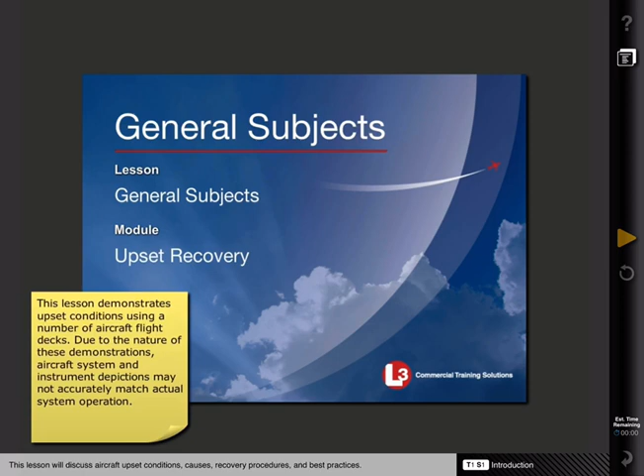Although loss of control in-flight accidents are relatively rare, they make up an average of 1/4 of all aircraft fatalities worldwide. An ICAO symposium tasked with addressing these incidents showed a lack of proper pilot training industry-wide for aircraft upset awareness and recovery techniques. The committee expressed support for a global and coordinated effort to address loss of control accidents.

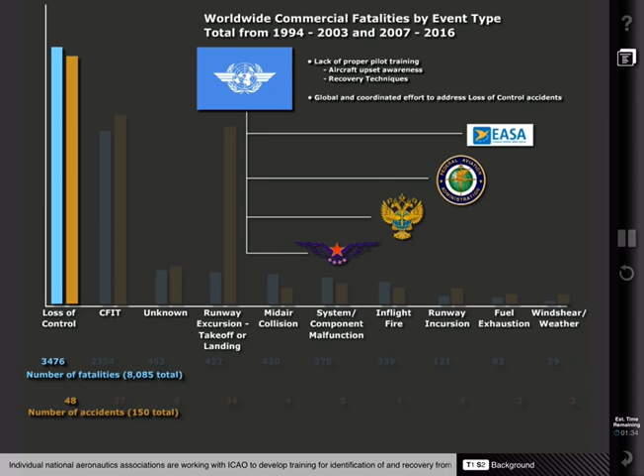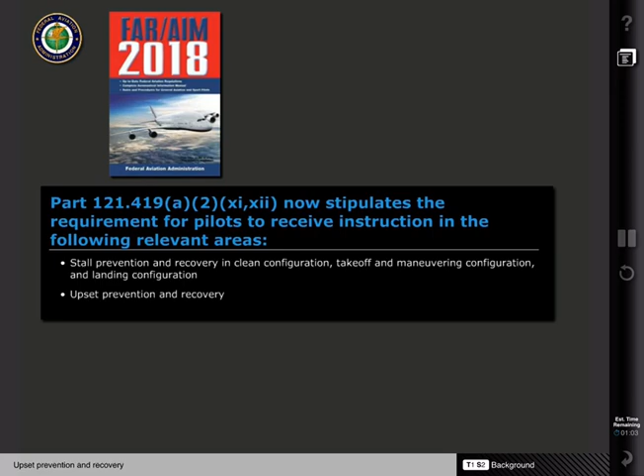Individual national aeronautics associations are working with ICAO to develop training for identification of and recovery from upset situations. In the U.S., this has led to a revision of the Code of Federal Regulations. Part 121-419A-2, Subparts 11 and 12, now stipulates the requirement for pilots to receive instruction in the following relevant areas: stall prevention and recovery in clean configuration, takeoff and maneuvering configuration, and landing configuration, and upset prevention and recovery.

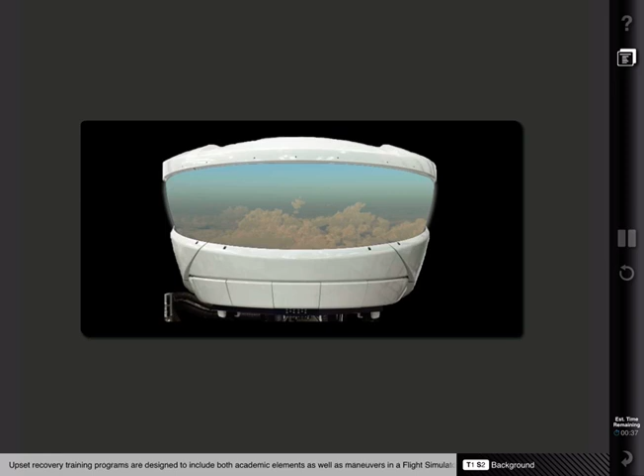Further along in Part 121-419, it is stated that the training will be required no later than March 12, 2019, and must include 2 hours of ground training. Upset recovery training programs are designed to include both academic elements as well as maneuvers in a flight simulator training device, or FSTD. This training is required for pilots undergoing initial, transition, and upgrade training.

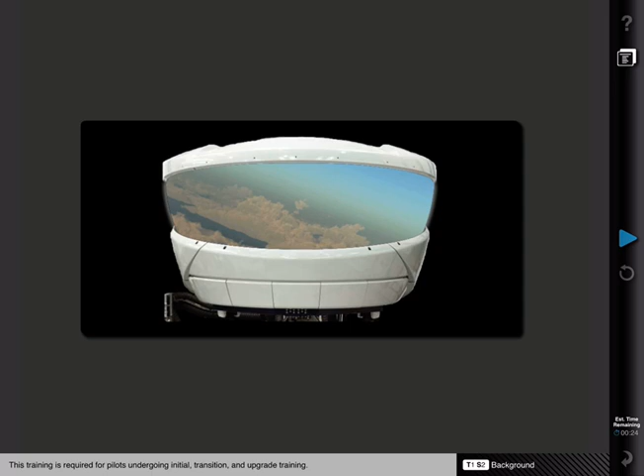In conjunction with the discovery of a pilot training deficit, it was found that most Level C and D training devices could not accurately replicate aircraft characteristics in upset envelopes. New requirements were put into place for simulator upgrades to include proper aerodynamic handling for these flight regimes.

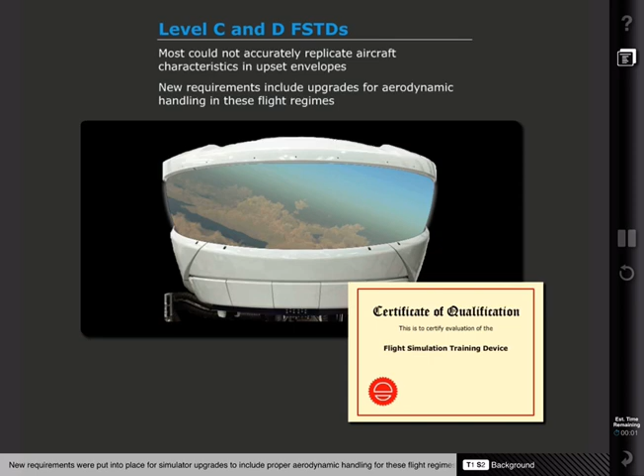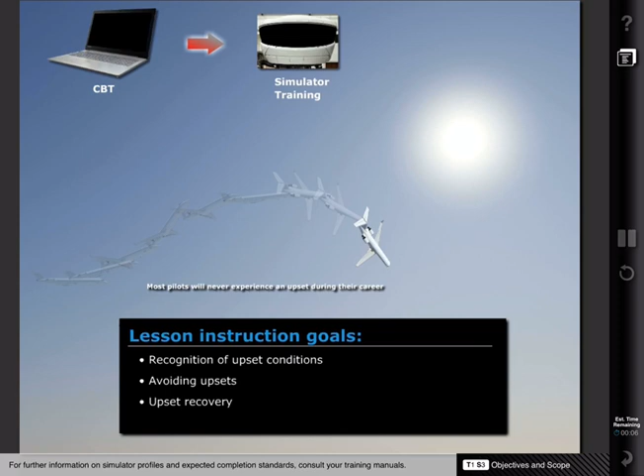Thanks to industry and manufacturer safety improvements over the past few decades, most pilots will never experience an aircraft upset during their career. Pilots must regularly train for and be vigilant in assessing upset conditions. The goal of this lesson is to instruct flight crews in the following areas: recognition of upset conditions, avoiding upsets, and upset recovery. This lesson is designed to preface and complement the required simulator training specific to upset recovery procedures. For further information on simulator profiles and expected completion standards, consult your training manuals.

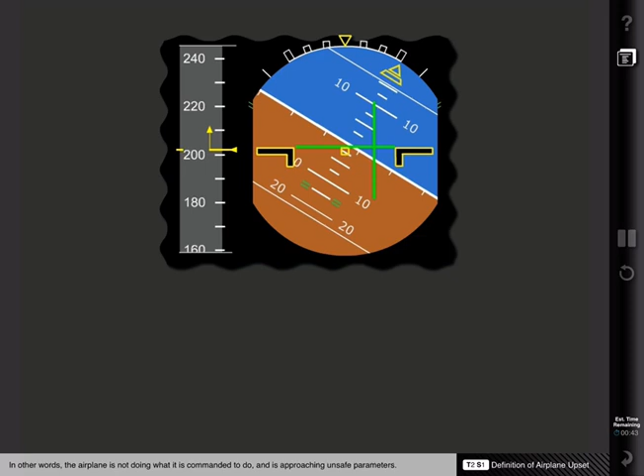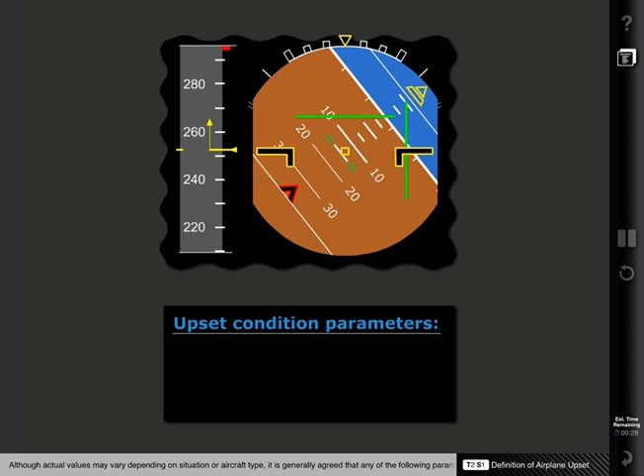An airplane upset is defined as an airplane in flight unintentionally exceeding the parameters normally experienced in line operations or training. In other words, the airplane is not doing what it is commanded to do and is approaching unsafe parameters. The key word in defining upsets is that it is unintentional. Although actual values may vary depending on situation or aircraft type, it is generally agreed that any of the following parameters, when achieved unintentionally, describe an upset condition: pitch greater than 25 degrees nose up, pitch greater than 10 degrees nose down, and/or bank angle greater than 45 degrees. An upset can also be defined when the aircraft is within the parameters above, but at airspeeds inappropriate for the conditions.

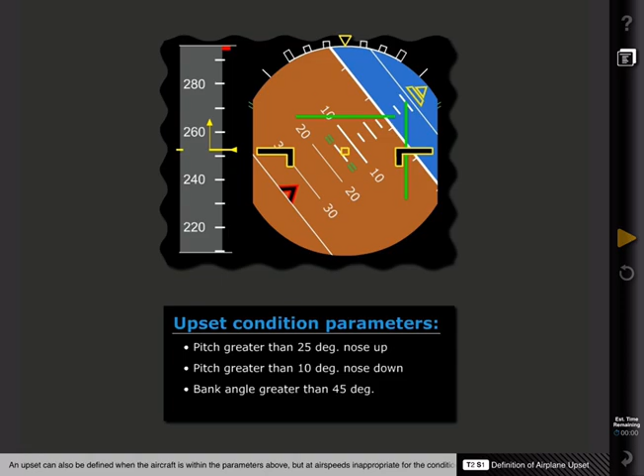In every possible scenario, avoiding an aircraft upset is far more desirable than having to recover from one. Prevention is key to upset condition training. Active monitoring of the aircraft and proper judgment is critical to avoiding an upset condition. Active monitoring can be defined as a proactive, knowledge-driven process of encountering and keeping track of how things are in relation to the perceiver and his expectations to enable the perceiver to take meaningful action. This means seeking relevant information, making important information available, filtering information that is meaningless, creating new information, and offloading cognitive processing onto the interface or adapting the interface to support monitoring.

Proper monitoring includes each pilot doing the following: know and understand the expected airplane state for the situation. Communicate expectations. Keep track of current airplane state. Detect and communicate deviations from expectations. Assess risk and decide on a response. Update and communicate understanding. And take timely corrective actions. These practices are the foundation for preventing and avoiding aircraft upsets through early intervention. Early interventions and correcting undesired flight path discrepancies will stop a divergence before it can evolve into an upset.

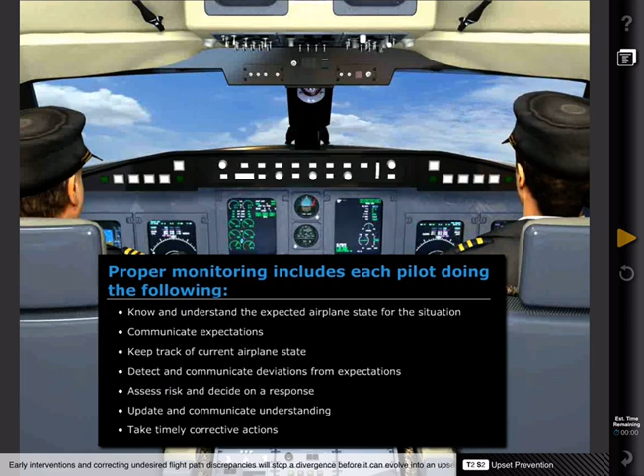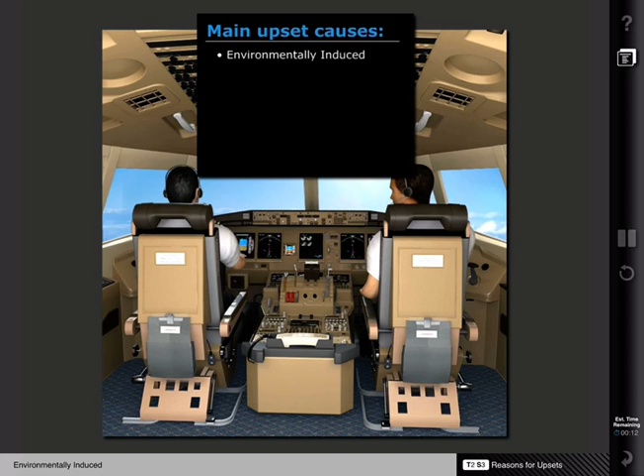Although the reasons for aircraft upsets may vary greatly, and in some incidents may be hard to ascertain, it is understood that the main categories of upset causes are: environmentally induced, system anomaly induced, pilot induced, or a combination of any of the above.

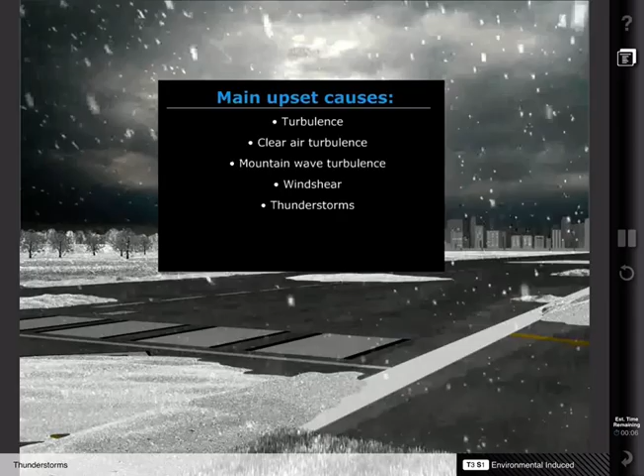Environmental factors are the largest factor in airplane upset incidents. With the exception of wake turbulence, environmental factors all derive from weather sources. Weather events that result in airplane upsets can include any of the following: turbulence, clear air turbulence, mountain wave turbulence, wind shear, thunderstorms, microbursts, or icing.

Non-clear air turbulence is that which is caused by convective or frontal air disturbances. This type of turbulence is typically associated with areas of measurable precipitation. Under most circumstances, these areas of weather-related turbulence are accurately forecast and can be detected real-time using onboard weather radar. For these reasons, this type of turbulence is the easiest to avoid.

Proper flight planning and situational awareness will reduce the number of situations where aircraft are flown into areas of known turbulence. If weather penetration does occur, severe or extreme turbulence can lead to an aircraft upset condition.

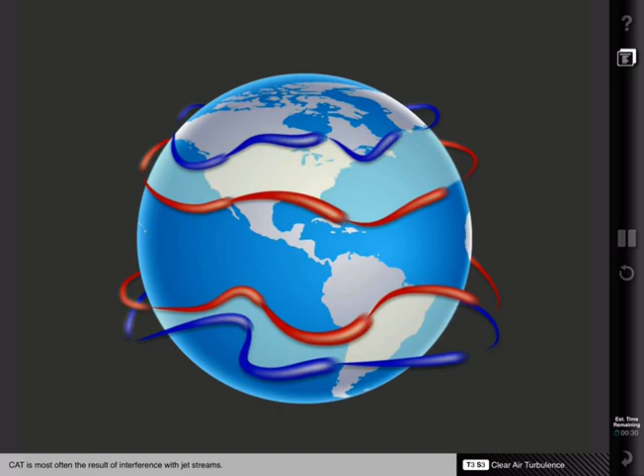Clear air turbulence is harder to forecast and therefore harder to avoid compared with convective weather turbulence. Clear air turbulence is most often the result of interference with jet streams. Atmospheric jet streams may exist in any number, at any time, and in any location. This, along with jet streams' characteristic of not having a consistent shape or size, means they are difficult to predict. Knowledge of high-altitude meteorology can aid in jet stream awareness, but the best predictor for clear air turbulence is pilot reports.

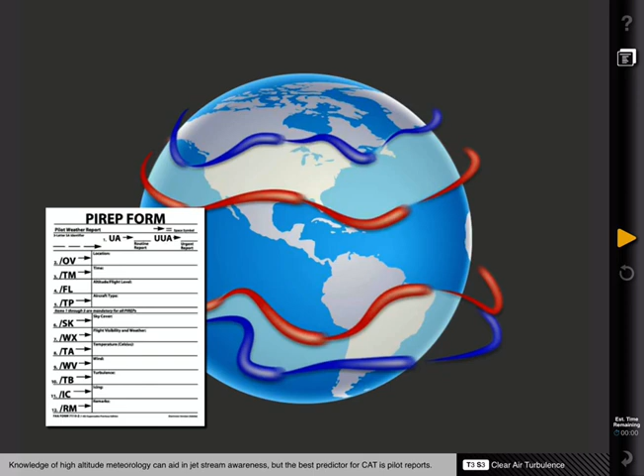Mountain wave or orographic turbulence is caused by disruption of wind flow by natural or man-made barriers such as a mountain range. Like clear air turbulence, this type can be formed in areas of no convective weather or precipitation. Because mountain wave turbulence is simply a factor of wind and geography, it can be easy to predict.

For example, when transiting the front range of the Rocky Mountains with a strong westerly wind, there will be a very high chance of mountain wave turbulence. While forecasting this kind of turbulence may be easier, avoiding it may not always be feasible if operating into or out of airports near these areas.

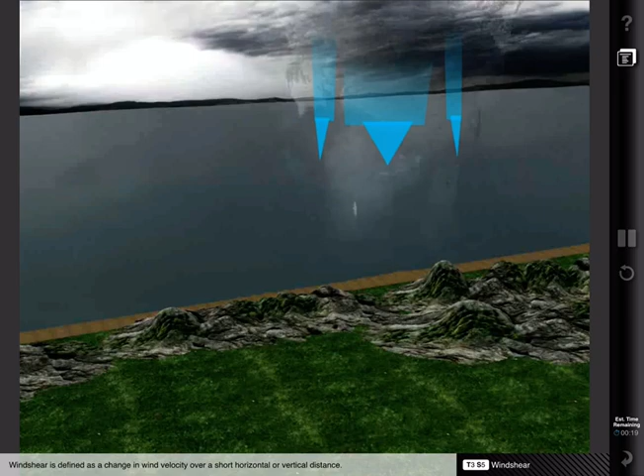Wind shear is defined as a change in wind velocity over a short horizontal or vertical distance. This can be caused by a number of different phenomena, some of them more avoidable than others. The best strategy for avoiding wind shear is to monitor pilot reports and be aware when operating in areas with known shear.

While there are different types of thunderstorms, all of them can be considered hazardous when it comes to turbulence and aircraft upsets. All thunderstorms are comprised of strong updrafts and downdrafts. Many storms also feature a gust front, an area of very strong winds and turbulence caused by the downdraft of rain-cooled air out of the storm.

Microbursts, a phenomenon associated with very powerful storms, are a rapid outflow of air from the base of convective weather. It is thought that about 5% of thunderstorms will produce a microburst. Intentional flight into a thunderstorm or microburst presents a substantial risk and can very easily lead to an aircraft upset.

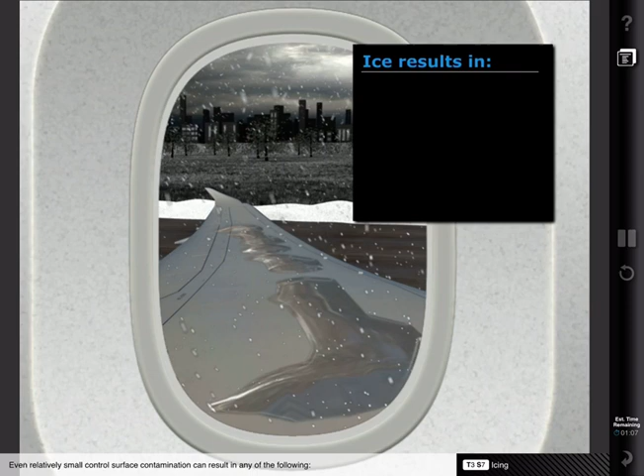Over the years, there has been a great deal of study to understand the formation of icing and mitigate its impact on safe flight. While the scope of this lesson is not to instruct in the best practices and techniques for operations in icing conditions, it should be stated that icing is a serious hazard that can and has led to aircraft upsets. Even relatively small control surface contamination can result in any of the following: unexpected airplane handling characteristics, degradation of lift capability, increased drag, or possible unanticipated changes in stability and control.

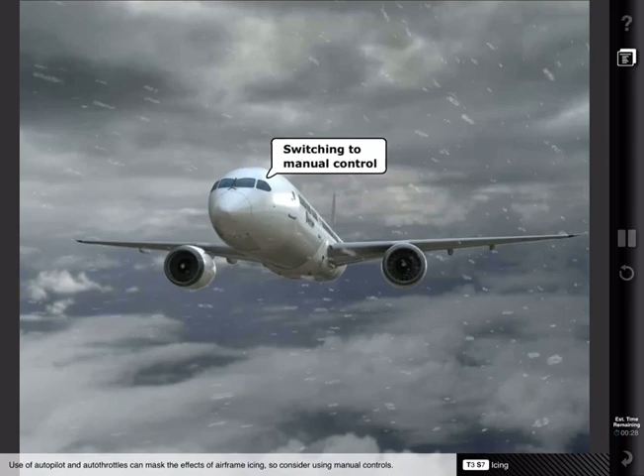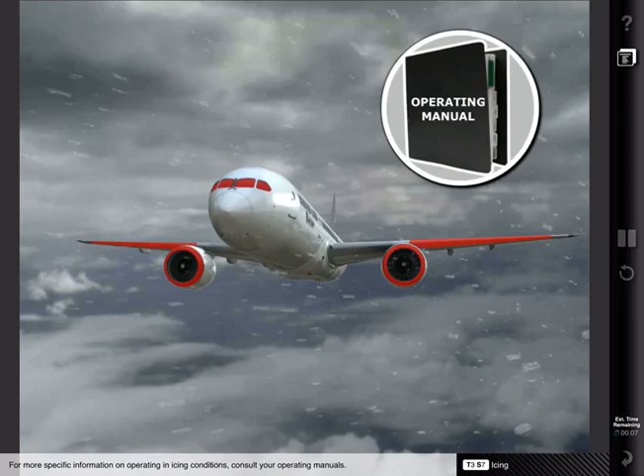Avoiding icing to keep a clean airplane is always the best course of action. If flight into icing conditions is unavoidable, appropriate precautions should be taken. Use of autopilot and autothrottles can mask the effects of airframe icing, so consider using manual controls. All applicable anti-ice systems should be operated when necessary. In addition, when in terminal environment, it is sometimes a good practice to operate at slightly higher than normal airspeeds. For more specific information on operating in icing conditions, consult your operating manuals.

Wake turbulence is the leading cause of environmental upsets. Most commonly, a wake turbulence encounter produces an induced roll or pitch maneuver. In very rare instances, wake turbulence can cause structural damage to the aircraft, with some pilots describing the event like hitting a wall. The strength and severity of the wake, as well as the aircraft's capability of escaping the encounter, will vary greatly between instances. In any case, the pilot should be ready to recover from any resulting upset condition.

As with any other upset cause, avoidance is the best strategy. Wake turbulence avoidance involves following these guidelines. Be aware of larger aircraft flight paths. Take note of touchdown and takeoff points when following heavy aircraft. Incorporate wind effects when forecasting wake locations. Stay above and upwind of heavy aircraft flight paths when possible. And delay takeoff or landing behind heavy aircraft if safe wake separation is in doubt.

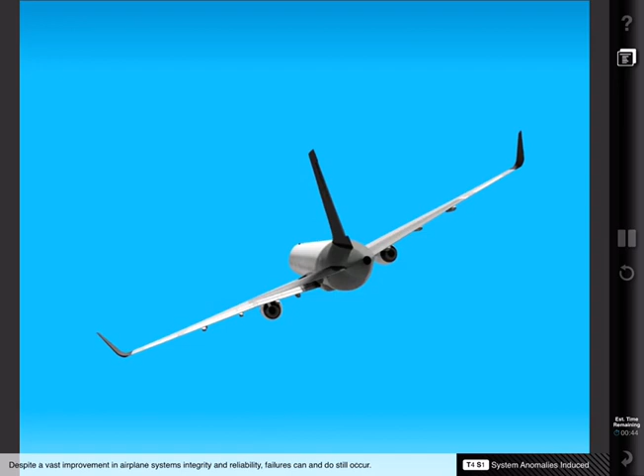Despite a vast improvement in airplane systems integrity and reliability, failures can and do still occur. The majority of system-induced airplane upsets are survivable as long as the correct actions are taken by the flight crew. Pilot familiarity with aircraft systems and how they can fail will greatly improve situational awareness and help avoid aircraft upsets.

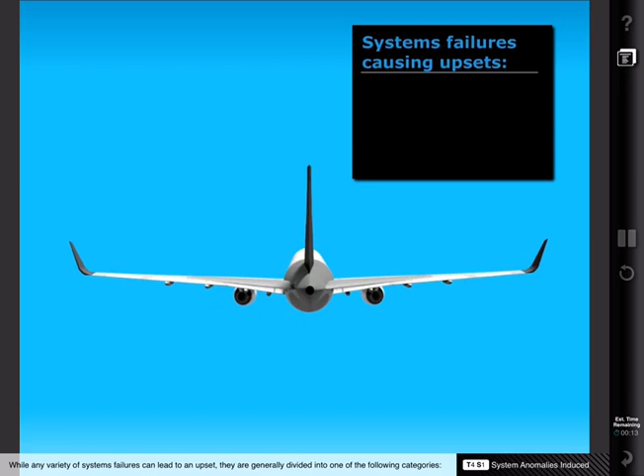While any variety of systems failures can lead to an upset, they are generally divided into one of the following categories: flight instruments, autoflight systems, flight controls, and other anomalies.

Flight instruments are an integral tool for safe flight. Because of this, most modern airliners are equipped with multiple redundant systems in the event of a failure. However, because of the increased reliability of these systems, problems with identification can arise when failures do occur. A lapse in cross-checking and failure management can lead to a breakdown in spatial situational awareness, which can then very easily lead to an upset.

In one example, an aircraft attempted to take off with the captain's side pitot tube blocked. The crew continued the takeoff, after which there was confusion regarding the airspeed discrepancy between the two pilots' indications. Neither pilot attempted to cross-check with the standby system to clarify which system was correct. As the flight crew maneuvered in an attempt to remedy the increasingly frequent overspeed stall warnings, an upset was entered that lasted for 2 minutes before finally impacting terrain.

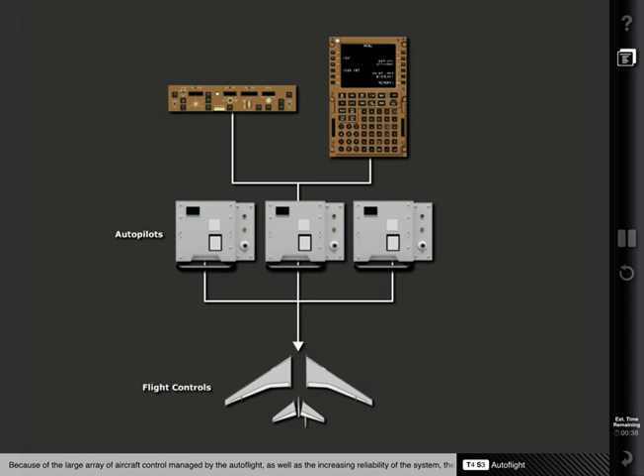The autoflight system integrates and manages a large array of flight inputs and controls. Because of the large array of aircraft control managed by the autoflight, as well as the increasing reliability of the system, the pilot community has developed a level of confidence and complacency. A fault or mismanagement in the autoflight system may lead the aircraft into an unusual attitude.

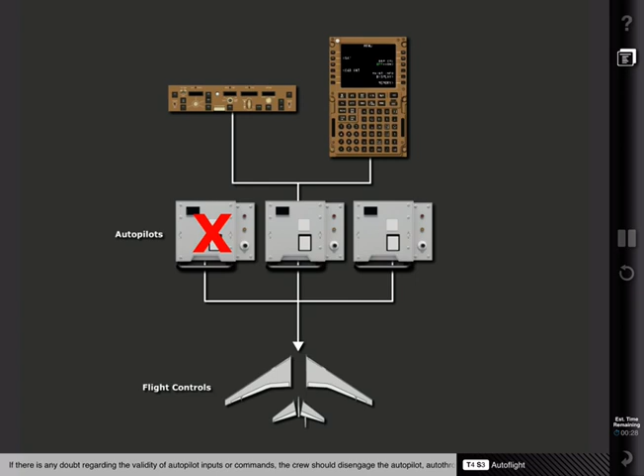If there is any doubt regarding the validity of autopilot inputs or commands, the crew should disengage the autopilot, autothrottles, or both. Be aware that some failures may be gradual and unannunciated, making identification difficult. Care should be taken during disengagement. Unexpected control forces and trim settings may result in an abrupt attitude change and possible aircraft upset.

Failures of the flight control system can directly lead to an aircraft upset with no action from the flight crew. Flap or slat asymmetries, spoiler malfunctions, trim runaways, rudder hardovers, and others, can impose an immediate, uncommanded roll, pitch, or yaw input on the aircraft. The best practice for these failures is for pilots to always expect the unexpected and have a predetermined course of action to remedy the condition. This is especially true in low-altitude, low-speed scenarios, such as takeoff and landing.

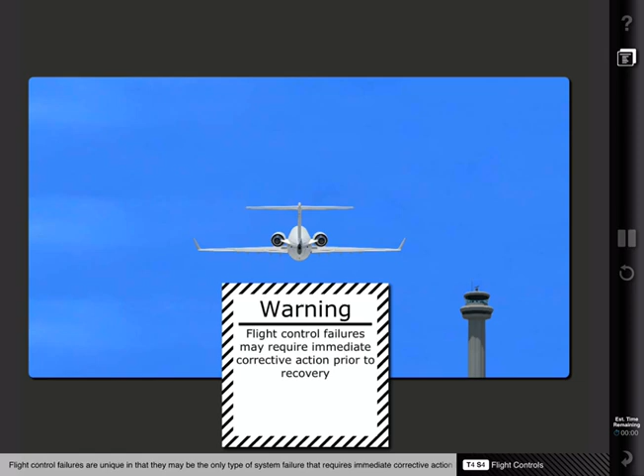Flight control failures are unique in that they may be the only type of system failure that requires immediate corrective action to prevent or recover from an upset. Other specific system anomalies that can lead to an aircraft upset include, but are not limited to, the following: stall warning failure, engine failure, or cargo shift.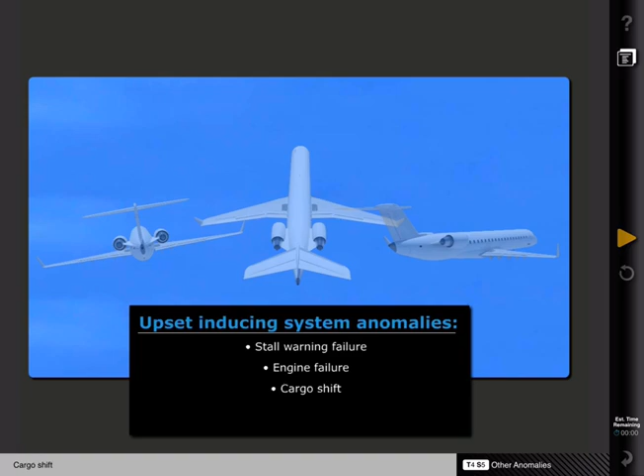In some instances, upsets are caused by the flight crew with no identifiable system failure. These pilot-induced upsets can be triggered by any number of events, but the two most common factors involve misleading sensory inputs and the inability to see the horizon. These two factors lie at the root of pilot-induced upsets, as they take away the pilot's ability to discern a proper flight attitude.

Pilot-induced upsets can be onset by some of the following events: misinterpretation of instruments, adjustment of attitude and power, inattention, distraction, vertigo or spatial disorientation, pilot incapacitation, or improper use of automation.

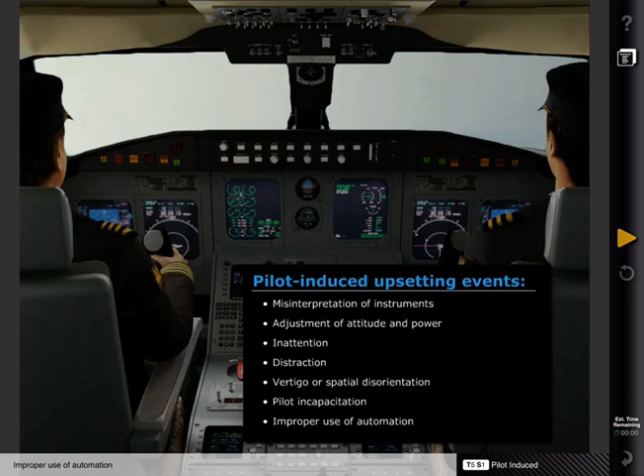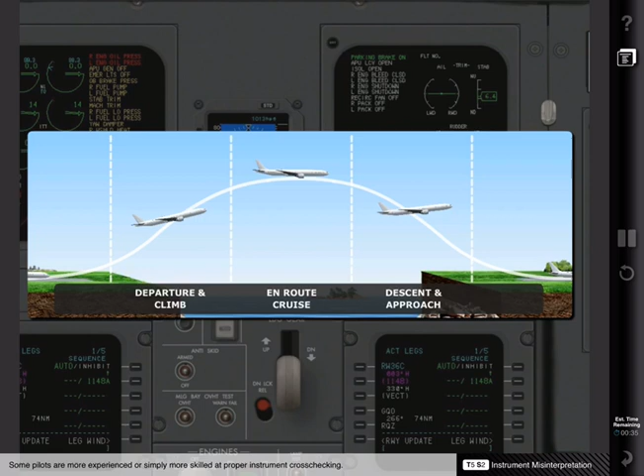Instrument cross-check is an important skill that all pilots learn during initial instrument training. However, the workloads of different flight phases and the ability of different pilots will vary. Some pilots are more experienced or simply more skilled at proper instrument cross-checking. In low workload flight phases, there are relatively few changes in aircraft attitude, so instrument scan is not as demanding. During these times, it is often adequate for a single pilot to monitor the aircraft attitude.

High workload phases, however, will demand both pilots to give more attention to the flight instruments. All flight crews should train and practice the skill of proper instrument cross-checking. During flight, it is necessary for the flying pilot to anticipate pitch, roll, and power inputs to meet the desired flight path. This anticipation of flight control inputs and the knowledge of how the inputs will affect the flight path is called airmanship.

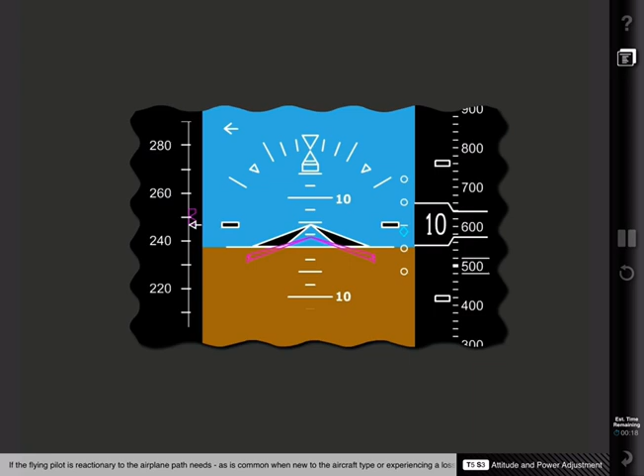If the flying pilot is reactionary to the airplane path needs, as is common when new to the aircraft type or experiencing a loss of situational awareness, over or under controlling can occur. This leads to a cycle of unplanned and excessive control inputs that can lead to a divergence from the intended flight regime. In some upset incidents, there have been occasions of two pilots applying opposing inputs in an attempt to anticipate the flight path.

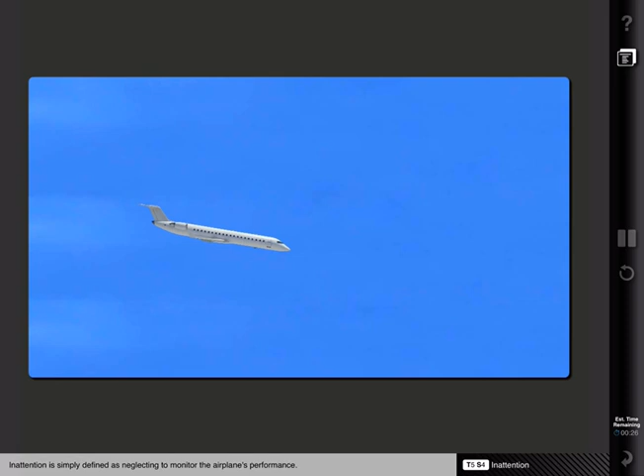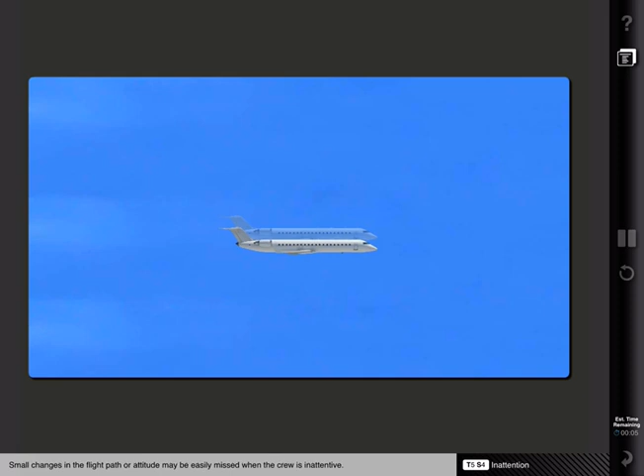Inattention is simply defined as neglecting to monitor the airplane's performance. This can mean the exclusion of attention to any aircraft system or function. Examples of inattention might be forgetting to add thrust when leveling off in an airplane, either without an autothrottle system or one that is inoperative. Small changes in the flight path or attitude may be easily missed when the crew is inattentive.

Distraction, like inattention, involves the flight crew not monitoring the flight path or aircraft systems properly. In the case of distraction, however, the root cause is an external or self-induced task that absorbs the attention of the pilots. Distractions can be duty-related, such as running checklists or completing paperwork, or non-duty related, such as eating, drinking, or conversing.

In one example, a flight entered an upset after the captain left the flight deck and the first officer began completing paperwork on a clipboard. At some point, the autopilot inadvertently disconnected, and the first officer did not realize until the aircraft was in a steep, nose-down right bank. In this example, both flight crew members were distracted, the captain with non-duty related items, and the first officer with paperwork.

Sensory illusions, such as vertigo and spatial disorientation, are caused by a conflict between instrument and visual indications and what the pilot feels is the correct attitude. Although vertigo and spatial disorientation can occur in any weather conditions and at any time, they are most commonly experienced at night and in marginal weather with an undiscernible horizon. This makes anticipating or recognizing spatial disorientation difficult. In fact, in some instances, the pilots may not even be aware of the discrepancy between perception and actual flight path.

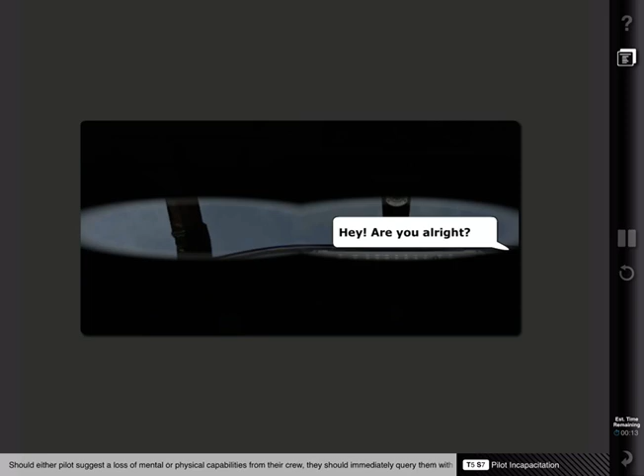Although a very rare event, there are times when a pilot may become physiologically incapacitated. The onset of incapacitation can happen abruptly or slowly and partially with a subtle degradation of mental or physical performance. Of these, the latter is more dangerous because of the lack of clear identifiable signs. This is also the more common type of incapacitation. If not caught, pilot incapacitation can quickly lead to an aircraft upset. Should either pilot suggest a loss of mental or physical capabilities from their crew, they should immediately query them with verbal communication. If there is a lack of response after multiple efforts, the other pilot should immediately assume aircraft control.

Advancements in aircraft technology have resulted in higher levels of automation, which, in turn, have resulted in higher levels of complexity. This complexity has led to instances where pilots either mistrust or do not understand autopilot modes and control inputs. Improper mode management of the autopilot can lead to excursions into the high or low speed buffet regime. Manual override of the control wheel during coupled autopilot operations can cause abrupt disconnection and subsequent upsets. The best strategy for avoiding these upsets involves pilot education and training to maintain strict proficiency on the autoflight system and operation. Anticipating autopilot mode changes and operations will increase situational awareness and decrease the chances of an upset.

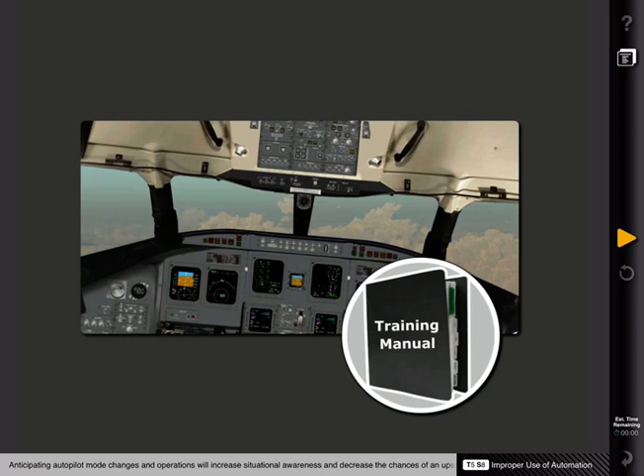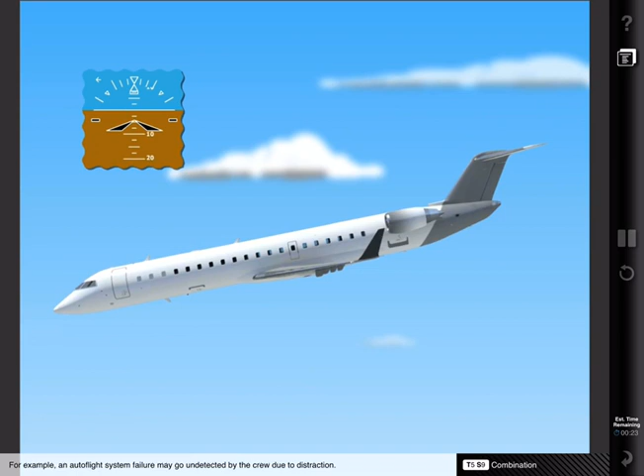Finally, and most commonly, there are times when a number of factors all contribute to an upset. Frequently, a single event may initiate the onset of other causes, which in turn result in an aircraft unusual attitude. For example, an autoflight system failure may go undetected by the crew due to distraction. When finally noticed, possibly the crew overreacts with pitch, roll, and thrust commands, which then induces an oscillation and subsequent upset attitude. Crews need to remember: be aware of the causes and conditions that lead to aircraft upsets.

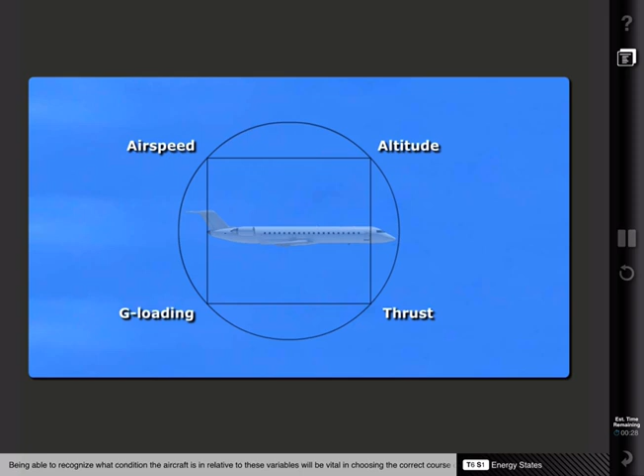It is important for pilots to understand the connected dynamic between aircraft airspeed, altitude, thrust, and G-loading. Being able to recognize what condition the aircraft is in relative to these variables will be vital in choosing the correct course of recovery. This is referred to as energy management. There are three basic kinds of energy during flight: kinetic energy, such as airspeed; potential energy, such as altitude; and chemical energy, or fuel, which transfers to thrust.

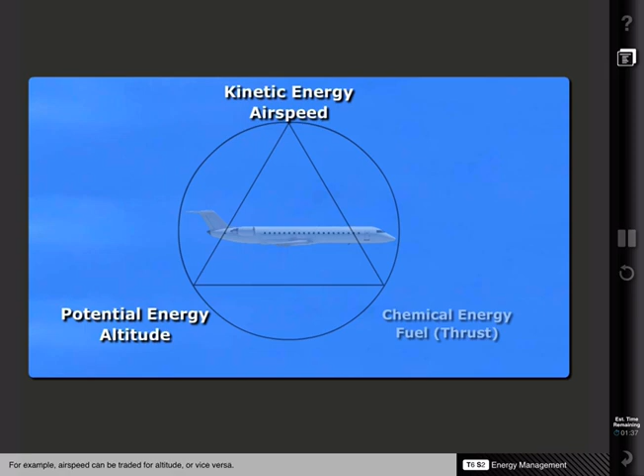The three different types of energy can be exchanged or traded for one another. For example, airspeed can be traded for altitude or vice versa. Kinetic energy, by its nature, needs to be continuously replenished by either potential or chemical energy. The process of trading different types of energy for each other is called energy management.

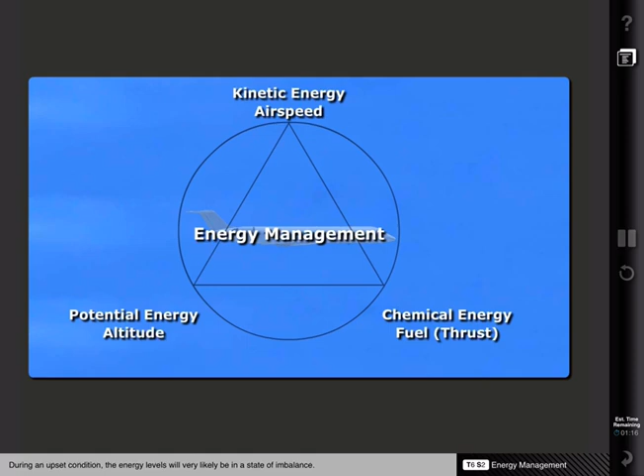During an upset condition, the energy levels will very likely be in a state of imbalance. In the example of an extremely nose-low attitude, potential energy, altitude, is rapidly being converted to kinetic energy, airspeed. In addition, if the engines are producing higher levels of thrust, chemical energy is adding to the levels of kinetic energy.

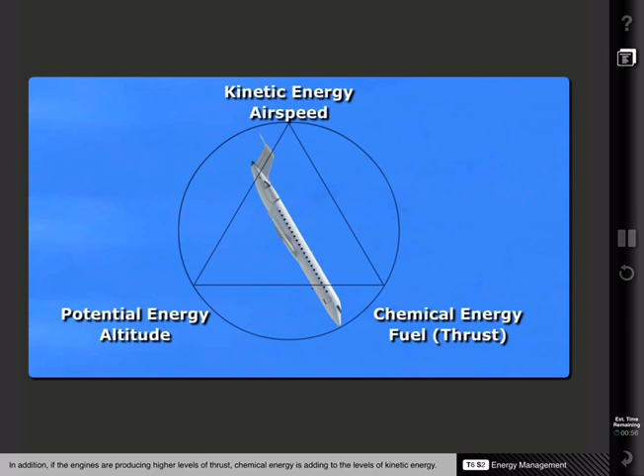Key elements of upset recovery include the following energy management steps: identify the energy state and trend of conversion, arrest the energy conversion, plan for the desired energy state balance, and execute a maneuver to achieve desired energy state balance.

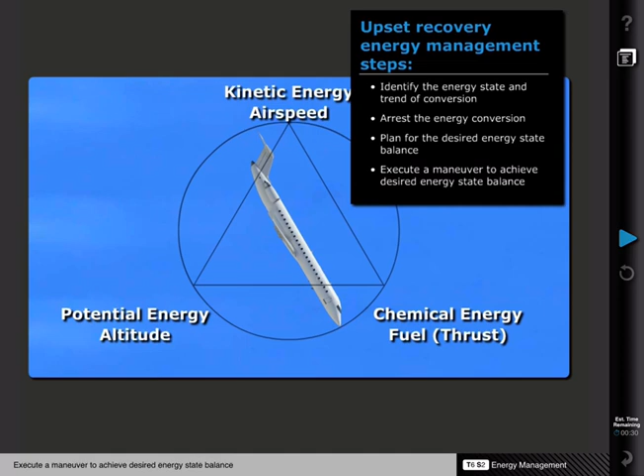One factor of energy management that is worth remembering, especially for pilots of transport category aircraft, is that the process of producing a new energy state takes time. The amount of time to recover energy states is a function of applied forces and the mass of the aircraft. Therefore, aircraft with larger mass will take significantly longer to balance the energy states.

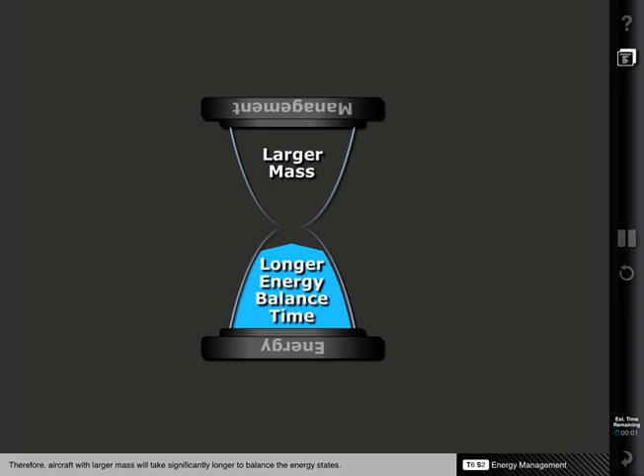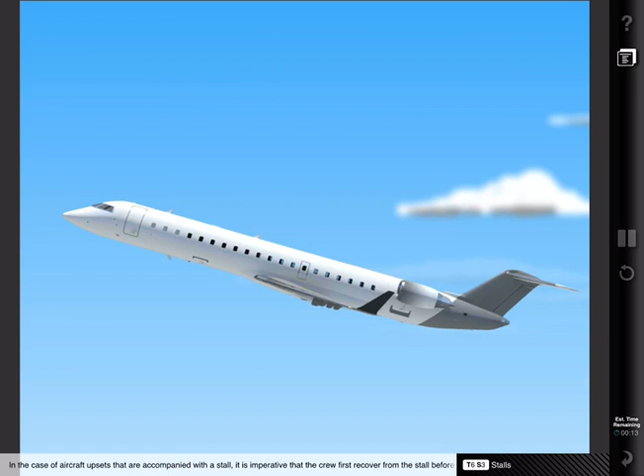Although stalls and aircraft upsets are unique from each other, they can be connected in some instances. Stalls can lead to aircraft upsets, and conversely, upsets can lead to stalls. It is important to remember that stalls are simply a function of angle of attack and can occur at any aircraft attitude or speeds. In the case of aircraft upsets that are accompanied with a stall, it is imperative that the crew first recover from the stall before the upset. Stall recovery techniques will be discussed further on in the lesson.

Operation at high altitudes involves certain elements that may lead to aircraft upsets. For example, when the aircraft enters upper air currents of decreasing velocity wind shear, the backside of the power curve may be encountered. The pilot flying must increase thrust or decrease angle of attack to allow the aircraft to accelerate and resume normal climb or cruise airspeeds. This procedure may require sacrificing altitude in favor of airspeed to accelerate away from the backside of the power curve. Failure to accelerate from the backside of the power curve may result in a stall.

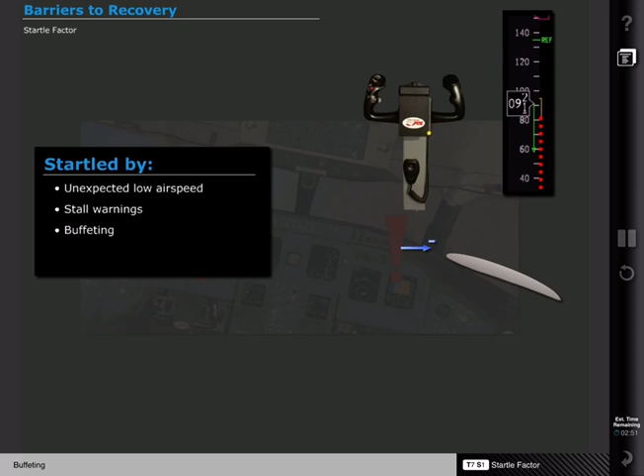Because airplane upsets are statistically quite rare and by their nature unpredictable, there is associated with them a significant startle factor. This occurs when the flight crew is suddenly faced with a situation that does not match with their expected reality, leading to a strong sense of surprise. Crews may be startled by anything out of the ordinary, including, but not limited to, unexpected low airspeed, stall warnings, buffeting, or large changes in aircraft attitude.

Startle factor is neither a cause for the upset nor an element of the recovery. It is a byproduct of the situation, which must be overcome before executing a successful recovery. Pilots can exhibit any of 4 possible negative responses to startle: early reaction, overreaction, indecision, or fixation. These responses are distinct from one another. During an upset, crews may experience any of them or none at all, depending on personality and the degree of the upset situation.

Much like an automobile driver who is suddenly aware of slowly drifting into another lane, the startle factor can lead pilots to react quickly without analyzing what is happening. Crews who react too early without properly mentally engaging the issue are more likely to make an incorrect recovery action.

In much the same way, pilots who respond negatively to startle are prone to overreact. This response, engaging in a proper corrective action but too aggressively or to an excessive degree, can very quickly exacerbate the problem. In some upset incidents, an overreaction led to a pilot-induced oscillation that might have been worse than if the crew hadn't reacted at all.

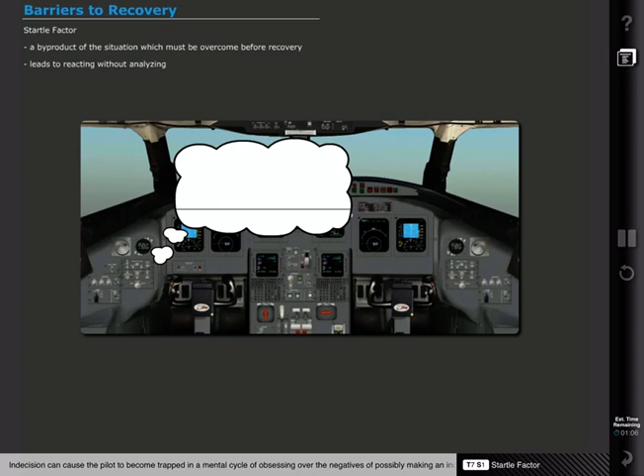Indecision can cause the pilot to become trapped in a mental cycle of obsessing over the negatives of possibly making an incorrect action. This stress over doing the wrong thing may lead the pilot to do nothing at all. Finally, in many instances, the startle factor causes the crew to fixate on one indication or data input. This creates a precipitous decline in cross-checking and situational awareness, wherein the cause of the upset might be missed. A loss of cross-check capability can be a strong hindrance to the recovery process.

The best first step to combating the effects of startle is for crews to be aware of them. Pilots can begin by asking themselves, what would an upset look like, and how would it affect me emotionally and on a purely instinctual level? In addition, practicing situational awareness and resilience are the primary tools for overcoming the effects of startle. These tools will be discussed in an upcoming topic.

Depending on the severity of the upset, recovery maneuvers may require either larger than normal G-forces or unloading the aircraft into the 0 or negative G regime. The psychological difficulty with this is that airline pilots normally make their best efforts at flying smoothly and keeping a constant positive 1G force. This is normal for providing a comfortable flight experience for the passengers and cabin crew. For an upset recovery, it is frequently not possible. Pilots must therefore be ready to overcome this inhibition and maneuver the aircraft into the 0G flight envelope.

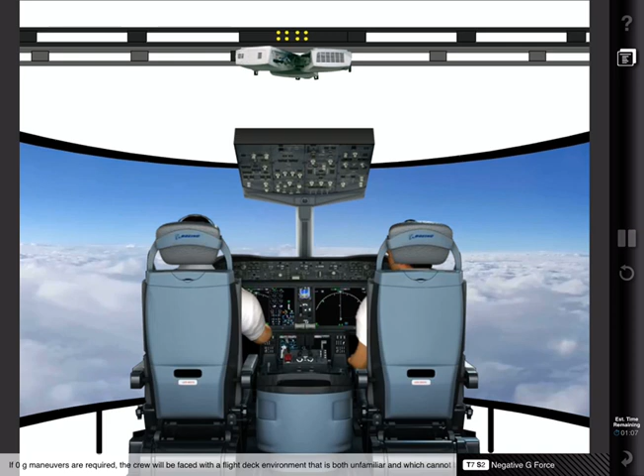If 0G maneuvers are required, the crew will be faced with a flight deck environment that is both unfamiliar and which cannot be realistically trained for in a simulator. The inability to properly simulate a negative G effect will only amplify the startle factor experienced by flight crews during an actual aircraft upset. Be aware, the recovery process in a real airplane upset will feel and look very different than the training in a simulator. Pilots who are mentally prepared for a significantly different feeling, especially in regards to G-loading, will be more likely to overcome the effect and perform a successful recovery.

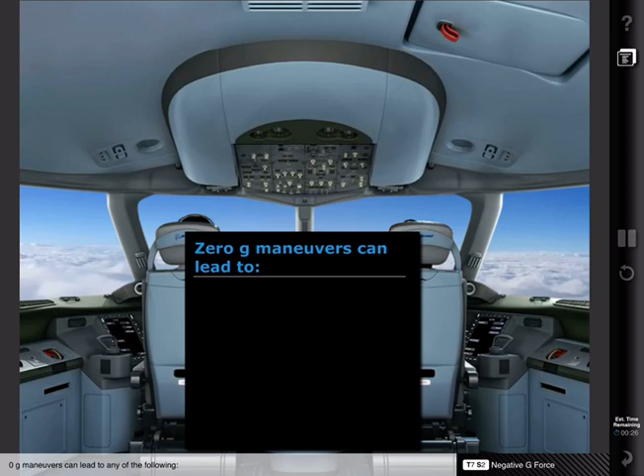0G maneuvers can lead to any of the following: pilots floating against seatbelts and harnesses, or out of the seat if not buckled in; inability to reach rudder pedals due to floating; unsecured items flying around the flight deck causing obscured vision; and, depending on the aircraft and situation, possible transient caution alerts.

Similar to pilots' reluctance to perform 0G maneuvers for recovery, most pilots rarely ever utilize the full control authority of the flight controls. This is something that is normally not done during routine line flying. However, due to the decreased control effectiveness of lower airspeeds, the crew should be prepared to use greater than normal inputs. Although full control input may be required during an upset recovery, the crew should beware against control reversals. There is no upset condition that would justify a rapid, full-scale control deflection from one side to the other.

Pilots should understand that in some upset circumstances, the best recovery procedure may conflict with training for similar situations. For example, required training for crews includes recovery from an approach to a stall. The recovery from an actual aerodynamic stall, however, may require actions that are the opposite of approach to stall recoveries.

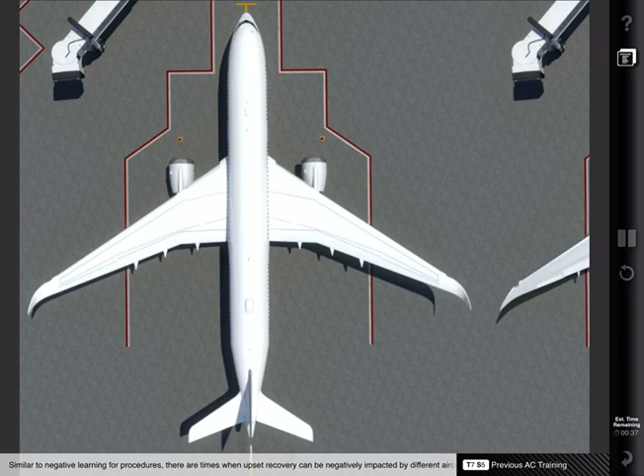Similar to negative learning for procedures, there are times when upset recovery can be negatively impacted by different aircraft experience. This is particularly true when system failures or aircraft idiosyncrasies are a factor in the upset. Pilots who transition into and out of aircraft with differing levels of automation are particularly susceptible to this type of negative learning. Flight crews should make themselves as familiar as possible with aircraft systems, paying particular attention to automation and degraded modes in fly-by-wire aircraft.

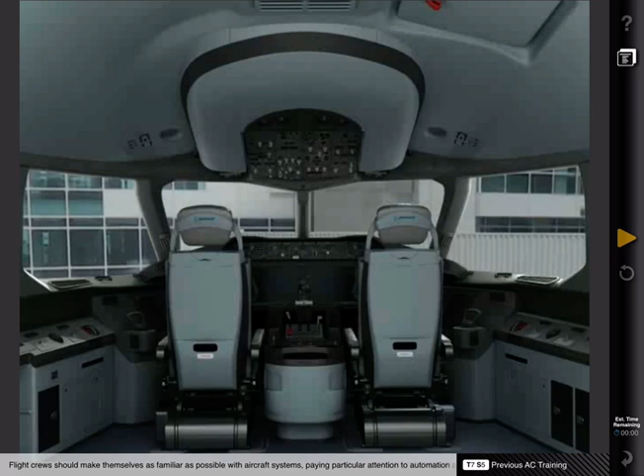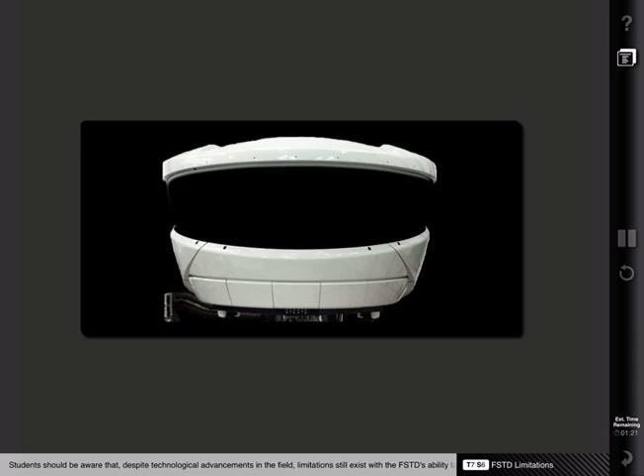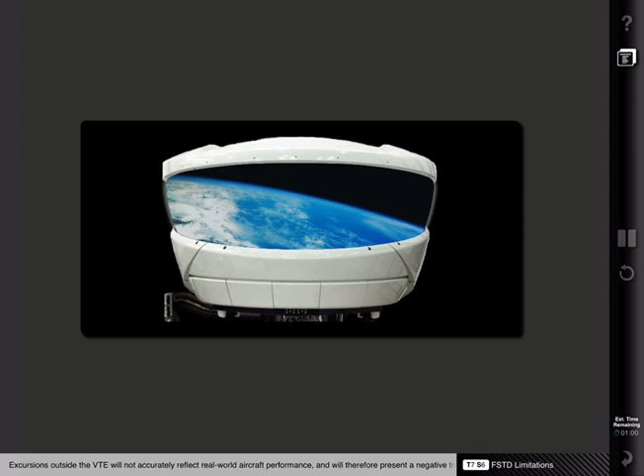Students should be aware that despite technological advancements in the field, limitations still exist with the FSTD's ability to recreate scenarios outside the normal flight envelope. It is important that upset prevention and recovery training is conducted within the applicable simulator's valid training envelope, or VTE. Excursions outside the VTE will not accurately reflect real-world aircraft performance and will therefore present a negative training experience. The upset prevention and recovery curriculum for all certified training programs is specifically designed to operate within the designated FSTD's valid training envelope.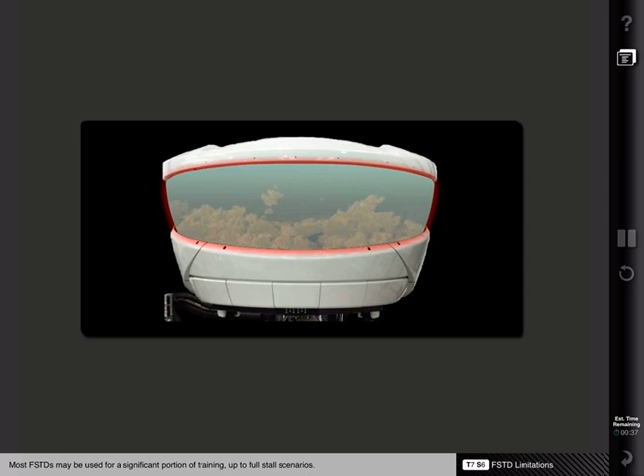Most FSTDs may be used for a significant portion of training, up to full stall scenarios. Currently, the aerodynamic models of most FSTDs are unable to adequately represent the airplane in a post-stall regime. The updates to FSTD certification requirements and regulations are designed to extend the VTE to include full stall training and comprehensive upset prevention and recovery training. For more information regarding your training device's specific VTE, capabilities, and limitations, contact your instructor or training department.

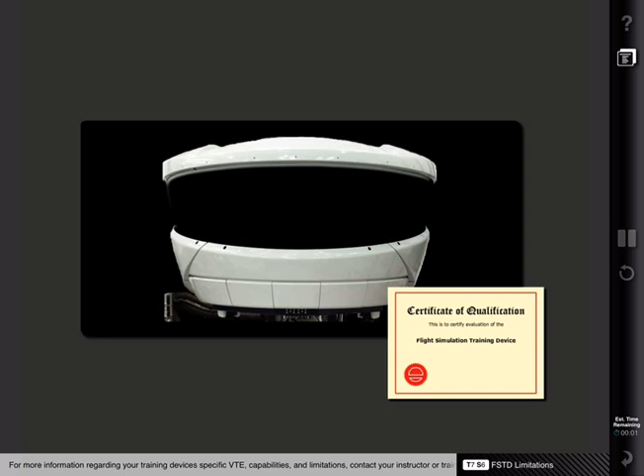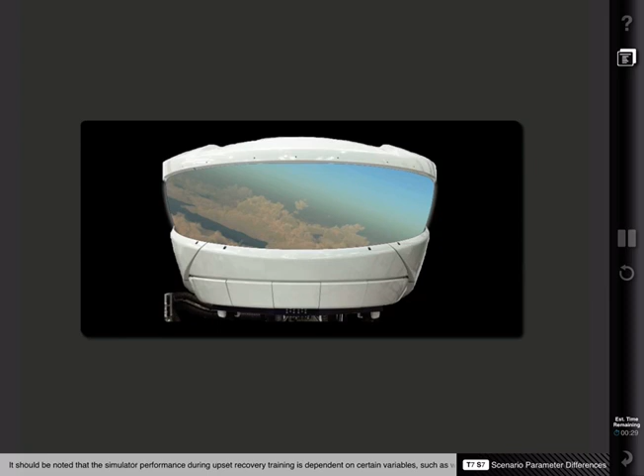It should be noted that the simulator performance during upset recovery training is dependent on certain variables, such as weight, CG, atmospheric conditions, aircraft altitude and airspeed, etc. Actual upset events are unlikely to take place at the exact configuration, altitude, and speed as trained in the simulator. Pilots should be aware of these negative learning aspects and be prepared to incorporate their knowledge into actual recovery techniques.

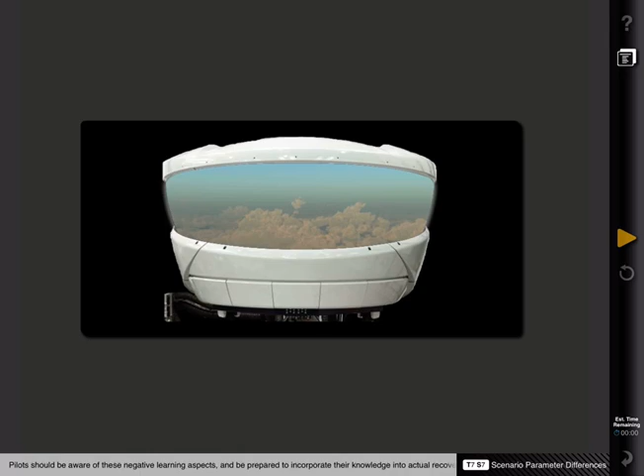This topic will discuss the most effective techniques of safely exiting an aircraft upset if one should occur. While the specific actions and techniques for different kinds of upsets will vary, the following 3 activities should be part of every recovery. Manage the energy, arrest the flight path divergence, and recover to a stabilized flight path.

While situational awareness is an important tool for avoiding aircraft upsets, it can also be equally important in recovering from one. Recognizing and understanding the upset scenario is crucial for a successful recovery. Pilots who are engaged and actively monitoring the aircraft will be much more situationally aware and less susceptible to startle effects. Crews should avoid reacting when feeling startled into fixating on a single indication. The first step is to regain situational awareness and analyze what is happening before acting.

Next, purposeful communication between crew members will ensure both pilots have all the knowledge regarding the aircraft's condition and are working together towards a common solution. At the first indication of a flight path divergence, both pilots should announce what is being observed. Proper communication will greatly increase the level of crew situational awareness. This is the first building block for the 3 steps of upset recovery: recognize, recover, and rebuild.

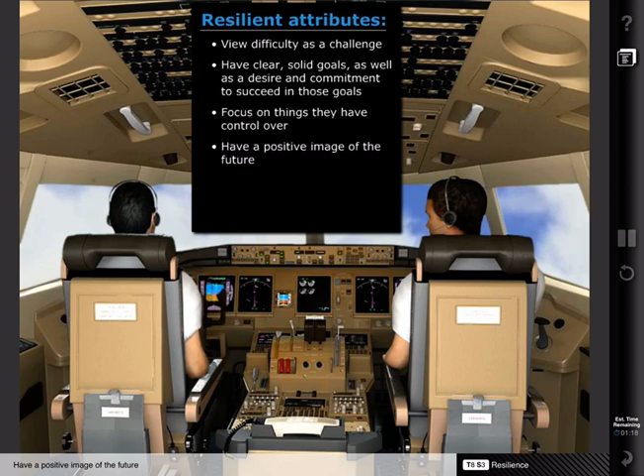An important personal quality for combating the startle effect is resilience. Resilience is our ability to adapt and bounce back when things do not go as planned. Resilient people are described as having the following attributes: view difficulty as a challenge, have clear, solid goals, as well as a desire and commitment to succeed in those goals, focus on things they have control over, have a positive image of the future, and are empathetic and compassionate, but do not bow to peer pressure.

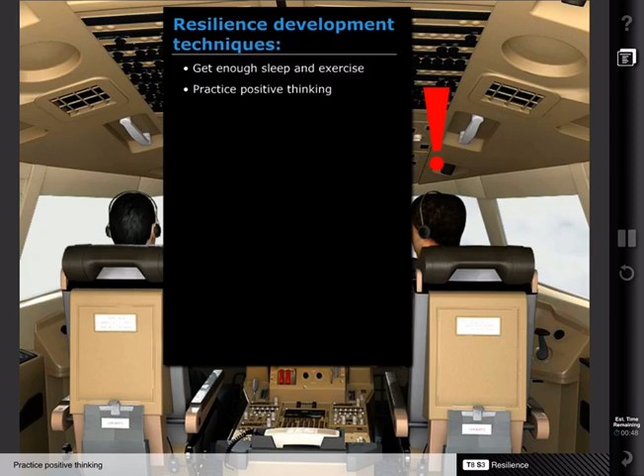Some people are naturally resilient. Others need to work at it for it to be an effective piloting tool. Those people who are not naturally resilient can use the following techniques to develop and hone a sense of resiliency. Get enough sleep and exercise. Practice positive thinking. Practice cognitive restructuring to change the way you think about negative situations. Learn from your mistakes. Choose to respond to negative events in positive ways.

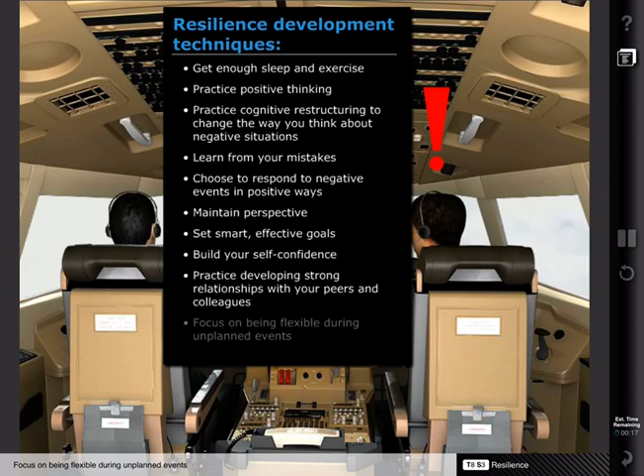Maintain perspective. Set smart, effective goals. Build your self-confidence. Practice developing strong relationships with your peers and colleagues. And focus on being flexible during unplanned events. Practicing resiliency fosters a personality of confident, informed decision-making skills, as well as the ability to confront and overcome setbacks.

Many upset recovery procedures and techniques may use the phrase, "unload the aircraft." Most commonly associated with nose-low upsets, unloading the aircraft means to decrease pitch inputs to minimize the G-load factor being applied to the wings. There are two reasons to do this: increase roll effectiveness and avoid accelerated stalls. As G-loading increases, which commonly occurs during an upset, aileron effectiveness decreases. Unloading allows a faster roll rate and therefore a faster recovery.

Additionally, as airplane bank increases, so does the stall speed. In a high bank upset, the aerodynamics of the wing will cause the stall speed to increase dramatically. If a pitch-up maneuver is executed during these high bank conditions, the low-speed buffet regime will increase and an accelerated stall may occur. Unloading the wings and keeping the aircraft at or below 1 G will prevent this stall from occurring.

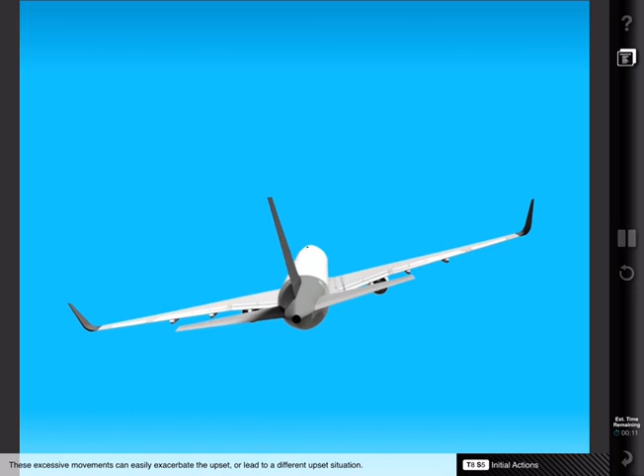The first few moments of an airplane upset recovery are vital to ensuring a safe outcome. The flight crew must first resist the reflex to initiate large, exaggerated control inputs. These excessive movements can easily exacerbate the upset or lead to a different upset situation. Gentle and timely inputs up to full control authority should be used.

For many pilots, the first instinct during an upset is to attempt to troubleshoot the cause of the upset. This can delay the recovery process and possibly allow the upset to worsen. Therefore, troubleshooting the upset cause should always be secondary to the recovery process. The only exception to this rule is in some cases of flight control malfunctions. In these instances, it is possible that the malfunction would preclude a safe recovery maneuver. The crew must use its best judgment when deciding the safest course of action.

Due to the unusual aircraft attitudes experienced during upsets, outside visual references are often not reliable sources of attitude information. Many times it can be difficult or impossible to see the horizon. Therefore, it is necessary for the crew to use the primary flight instruments when analyzing aircraft attitude. Additionally, because thrust is an important factor in the recovery, the engine instruments should be included in the instrument scan. If for any reason instrumentation or system failure is suspected as an upset cause, the pilot flying should include either the other pilot's instruments or the standby instruments in their scan.

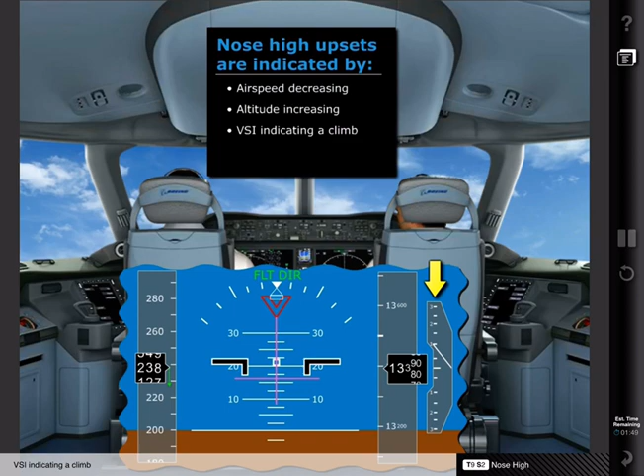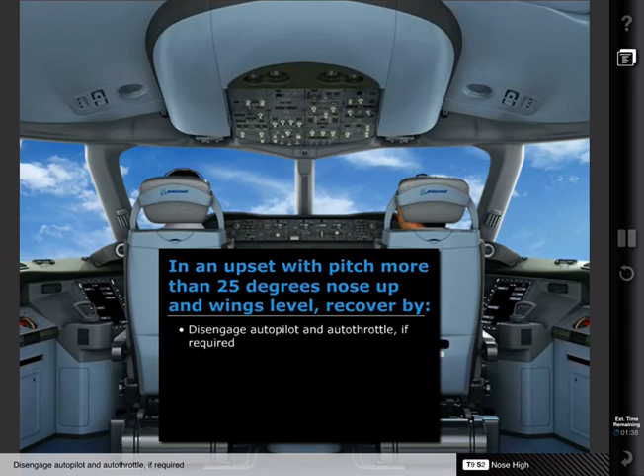Normally, nose-high upsets are indicated by airspeed decreasing, altitude increasing, and VSI indicating a climb. In an upset with pitch more than 25 degrees nose up and wings level, execute a recovery by doing the following. Disengage autopilot and autothrottle if required. Recognize and confirm the situation.

Apply nose-down elevator. And if required, use trim to assist in achieving a decrease in pitch. Use of elevator trim should be done with caution. Avoid using too much and stop trimming as soon as the required elevator force lessens. Excessive pitch trim or rudder may aggravate the upset situation or result in high structural loads.

If these steps are taken and the pitch is not under control, the pilot flying may take additional steps. First, the crew can decrease engine thrust to induce a lower pitch moment. This is only advisable with underwing-mounted engines and only if enough altitude permits.

The second option is to roll the aircraft to initiate a nose-down pitch movement. This transfers some of the wing's lift into the horizontal vector and should allow the nose to fall. While full aileron authority may be used, angle of bank should not exceed 60 degrees during this maneuver.

In the event roll control is ineffective, the crew may use rudder input to initiate a roll. However, only a small amount of rudder should be applied. Use of too much or too quick of an input may lead to a loss of lateral directional control.

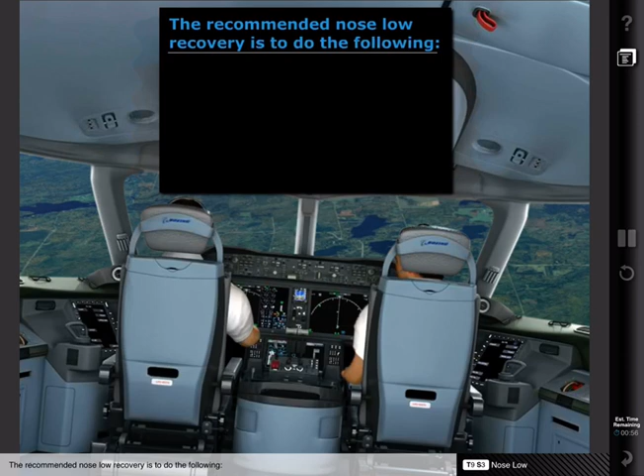Disengage autopilot and autothrottle if required. If in a stall, recover by applying nose-down elevator. Roll in the shortest direction to wings level if in a bank. Adjust thrust and drag if required. And recover to level flight, using pitch trim to assist with control forces if desired. The recovery is complete when aircraft pitch, thrust, and configuration match the desired airspeed.

During the pitch-up recovery maneuver, the pilot flying should take care not to pitch up too rapidly. An abrupt pitch maneuver can cause either an accelerated stall or a high G-load that exceeds the structural limits of the aircraft.

In a high-bank, nose-low upset, altitude is rapidly being exchanged for airspeed. For this reason, it is important to reduce G-loading when attempting to roll wings level. The roll procedure should be as follows. Unload the airplane by decreasing back pressure. Use full aileron and spoiler input to recover the roll rate to the nearest horizon. And add rudder input if aileron is ineffective at correcting roll.

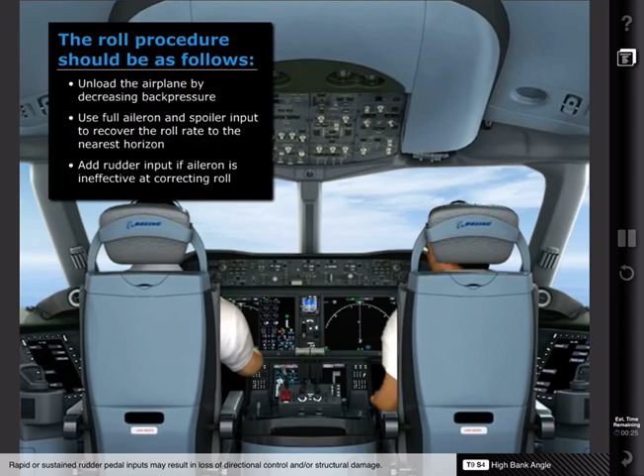Keep in mind that the first step, unloading the airplane by pushing forward on the control wheel, will be counterintuitive. This step, however, will be important to ensure adequate aileron effectiveness and roll rate. It is also important to remember that only a small amount of rudder should be used, if at all. Rapid or sustained rudder pedal inputs may result in loss of directional control and/or structural damage.

In transport category aircraft, it is not recommended to roll through the horizon in an attempt to achieve wings level more quickly. Roll recovery should always be in the shortest direction to wings level. This concludes the upset recovery lesson.